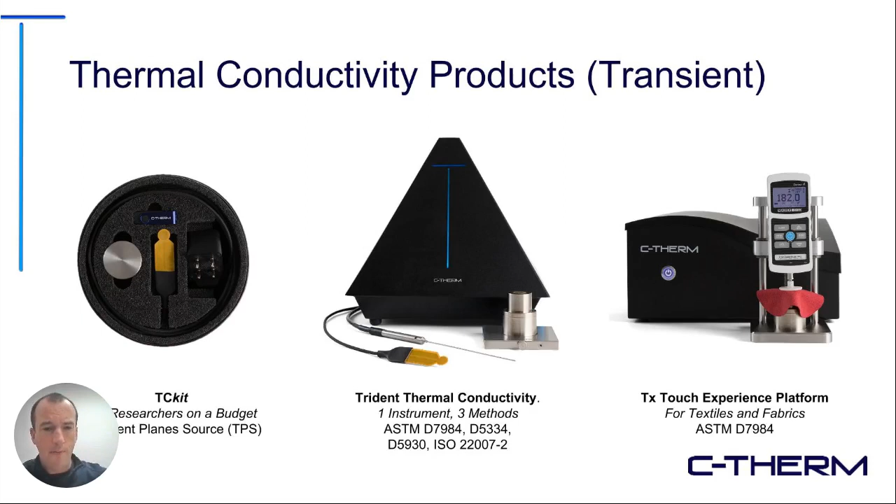But what you'll see featured in the content that Sarah will present largely focuses on the MTPS method. That's the stainless steel cylindrical shaped sensor that you see on the right of the controller, the Trident controller. You'll see a little bit of content on the Flex TPS as well. It's very useful in testing concretes and cements.

You probably won't see much of the needle transient line source in this presentation. It's reserved more for testing soils, for testing very sticky materials that might bond to the sensor. So a polymer melt would be a good example. But with Trident, it's a platform overall that's really meant to bring together the best of those available transient methods. The tag on the product is that it's one instrument, but it's three methods for thermal conductivity. And in thermal conductivity, particularly when you're dealing with a wide range of sample formats, it's truly better to have options at your disposal.

This just gives you a sense of the size of the sensors. So the needle probe is 150 millimeter in length. The Flex TPS sensors, those can come in a variety of sizes at 6, 13, and 30 millimeters. And then the MTPS has an active area on the surface of the sensor of 18 millimeters in diameter for the sensor. That would inform the minimum volume of material for you to run a test.

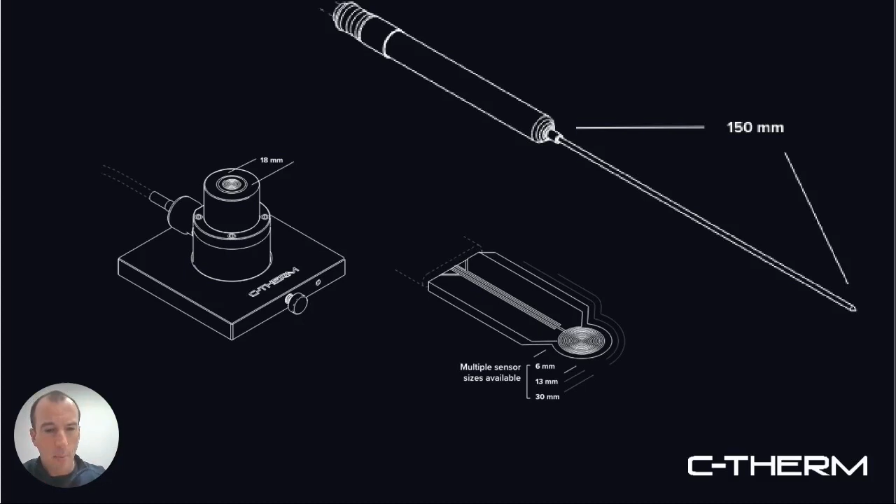Okay, at this point, I'm going to pass this over to Sarah, who's our expert in transient thermal conductivity measurement. She's a tremendous resource to us here at C-Therm, and I'm really pleased to have her come in and share that expertise with you. She'll be highlighting some different applications. This is meant as a training session in understanding how to measure the thermal conductivity of some of these different materials. She'll also detail some of the theory of operation of how those measurements work, which should help better inform you in terms of the capabilities of those particular methods, but also the limitations of where they should be applied. So with that said, Sarah, I'm very pleased to pass this over to you.

Thank you, Adam. I have to stop sharing. Yes, there we go. Okay. One moment. While Sarah's bringing up her slide deck.

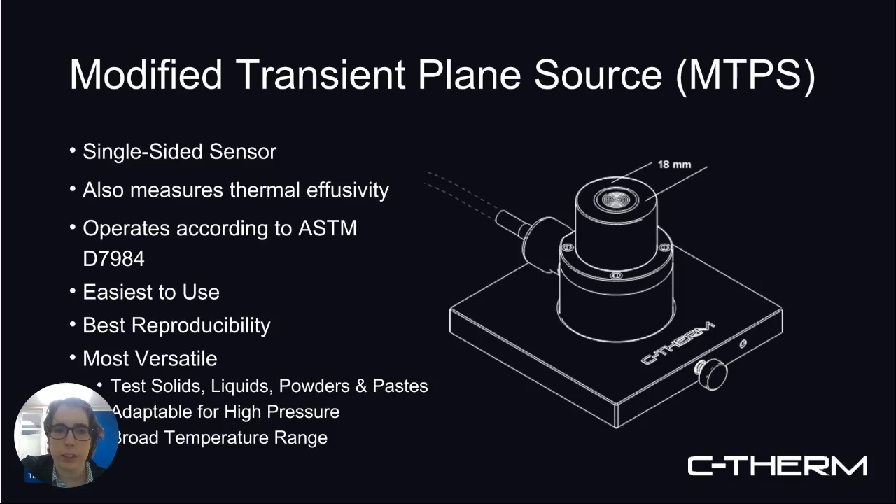Sometimes you may need to apply a bit of a weight to ensure good contact. Like I mentioned, it's a single-sided sensor, and it also measures another related thermal property called the thermal effusivity. And the thermal effusivity is really what is interesting about the TX instrument that Adam had highlighted earlier in his intro section. And that method as a whole, which is available on 2 of our platforms, is compliant with ASTM standard D7984. Of the 3 methods we offer, it's the easiest to use and offers the best reproducibility in the data, in addition to being the most versatile, which is not to say the other methods are not without their strengths. All 3 methods are very complementary.

So when you run a test with the sample on top of the sensor, if you take a close look at the sensor, what it would look like is a dark spiral trace on top of a green or white background, depending on the model of sensor. And that would be surrounded by a circular dark trace, which is our guard heater. So both the spiral and the guard heater fire at the same time. And what that has the effect of doing is ensuring there's no lateral heat or temperature gradient experienced by the sensor coil. The only gradient it experiences is in the direction directly up from the sensor surface, so normal or perpendicular to the sensor surface.

What that does is let us take a good look at the thermal effusivity and also prepare a calibration for the thermal conductivity so that the end user does not need to engage in any kind of complicated regression analysis or anything like that.

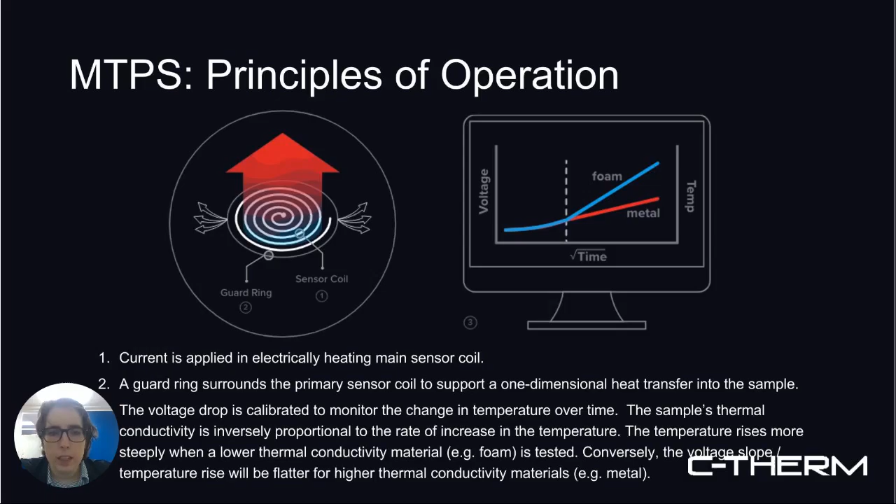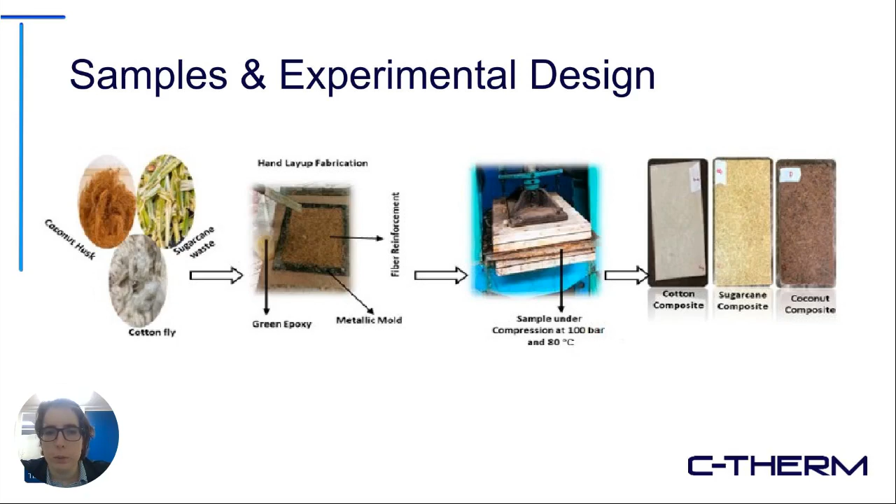So in this paper, they use 3 different types of pore-forming agents, and all of them were bio-based byproducts of other processes. So one was a cotton fly, another one was coconut husk, and then the third one was the sugar cane waste. And then they fabricated these blocks with polymer resin, with cotton, sugarcane, and again coconut. And that was used with the idea of improving the strength of the polymer material and also its thermal properties.

So, as would often be expected, these kinds of organic filler materials tend to be fairly porous. You would expect, and indeed the researchers did observe, that the thermal conductivity decreased as a function of the filler volume fraction. It also appeared to relate to the filler porosity level, which is as would typically be expected, again, of this sort of relationship.

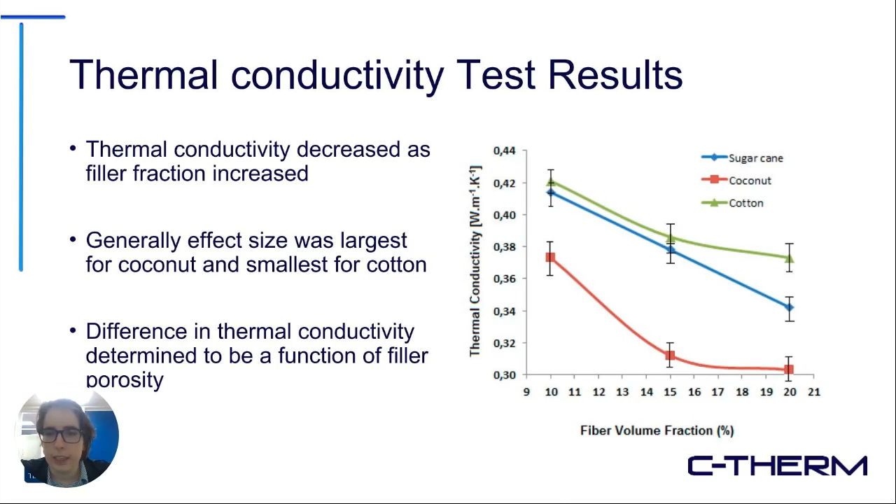The next one that we'll look at is titled Numerical Analysis of Phase Change Materials and Wood Plastic Composite Roof Module System for Improving Thermal Performance. So this was a paper published just this year, and it looked specifically at, of course, wood plastic composites, and specifically the use of phase change materials to regulate indoor temperatures.

So phase change materials, as a refresher, are materials that store thermal energy or heat energy by a change in the physical state of the material, usually as it goes from solid to liquid and back again. So as it heats up, it changes phase and it melts from solid to liquid phase, and heat is stored in that operation. And then when the ambient environmental temperature decreases, it re-solidifies and then the heat is released again. These kinds of materials can cycle many, many times. Although some of them, especially the newer, more bio-based ones, can sometimes degrade over time. The classical petroleum-based PCMs, on the other hand, tend to be very stable even across many thousands of cycles.

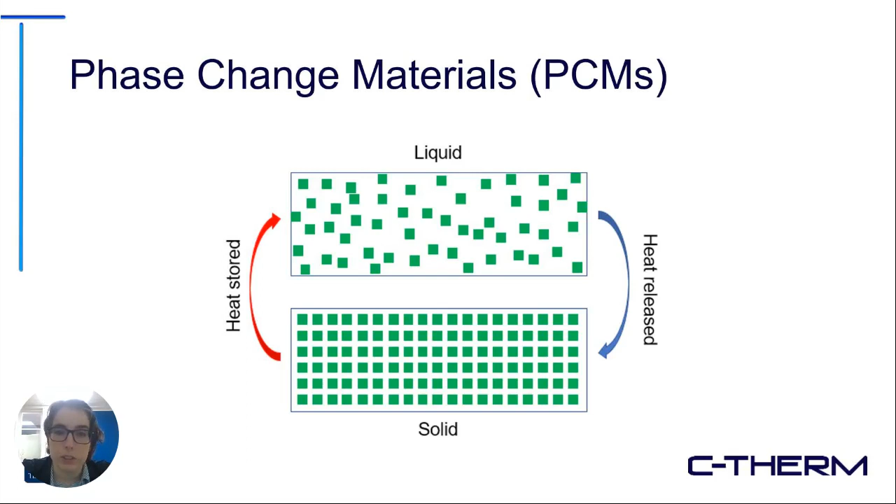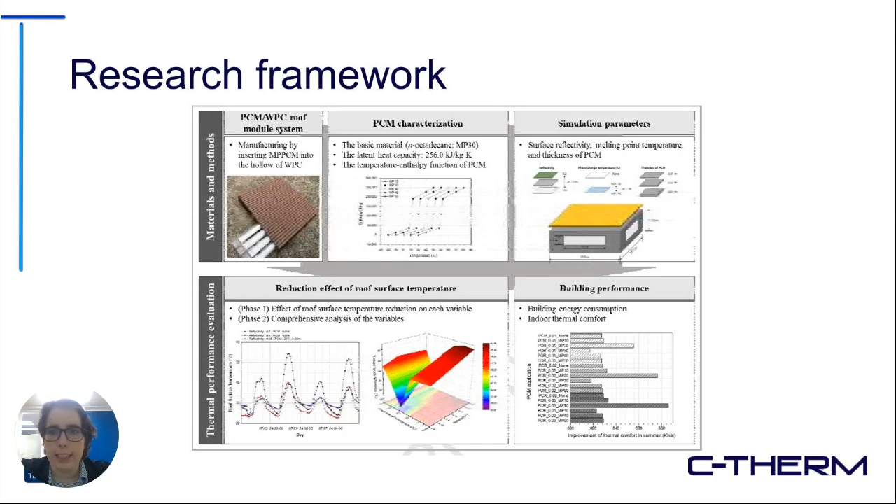So the framework of this particular paper, what they started with was designing the module system that included the phase change materials, and characterized the thermal properties, including the latent heat capacity and the sensible heat capacity of the PCMs, and inputted the data into a simulation to determine how it would perform as a function of yearly temperature variations, both day-to-day temperature variations, as well as more broadly seasonal variations.

So this is an example of one of these plots that was generated, and you can see the roof surface temperature is plotted on the y-axis, and the date and time is plotted on the x-axis. So you can see the daily variations in the roof surface temperature with different types of PCM. So this would be a PCM which was designed to melt at 20 degrees, which you can see in the pink, and one that was designed to melt at about 40 degrees, I believe. And you can see the variation in the temperature as a function of the time. This data was used to pinpoint the optimal roof cooling panel design.

And that in turn was basically inputted into further design and optimization characteristics for the project.

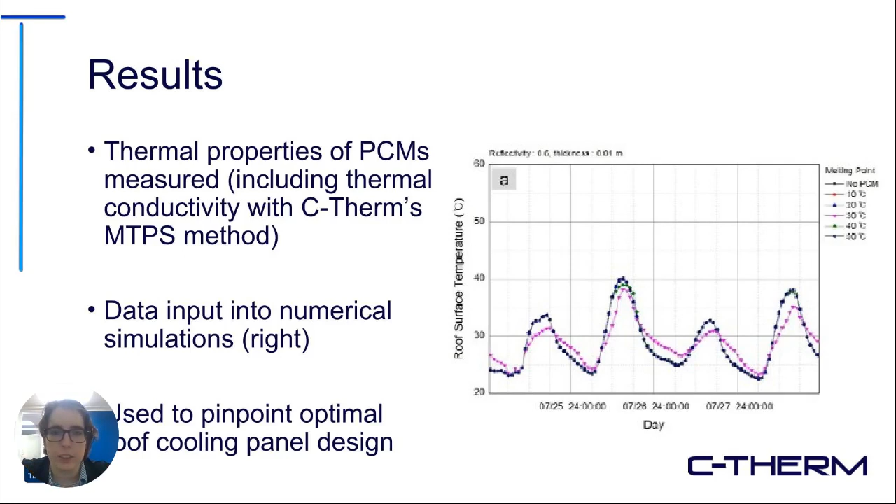This one is from the Journal of Thermal Analysis and Calorimetry, and it's kind of a more survey style project out of the Czech Republic, where they were looking at the thermal conductivity behavior of roofing slates. So a bit of background on this. In the Czech Republic and other neighboring areas, it's quite common to use naturally occurring slate minerals as a roofing tile sort of material. And these are referred to as roofing slates. Usually the material is actually a type of slate that's used.

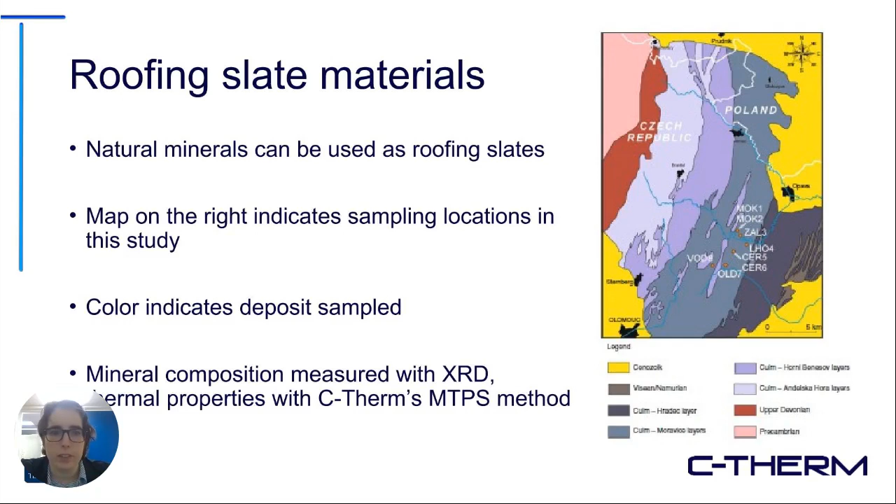So you can see on this plot the anisotropic thermal conductivity behavior of these different slate samples. Some of them are quite anisotropic, with the in-plane direction being twice or sometimes closer to 1.5 times as thermally conductive as the through-plane direction, and I believe in one case it's over twice as thermally conductive with the MOK2 sample. So what that shows is that these materials are much better at spreading heat than allowing it to penetrate through the plane of the material.

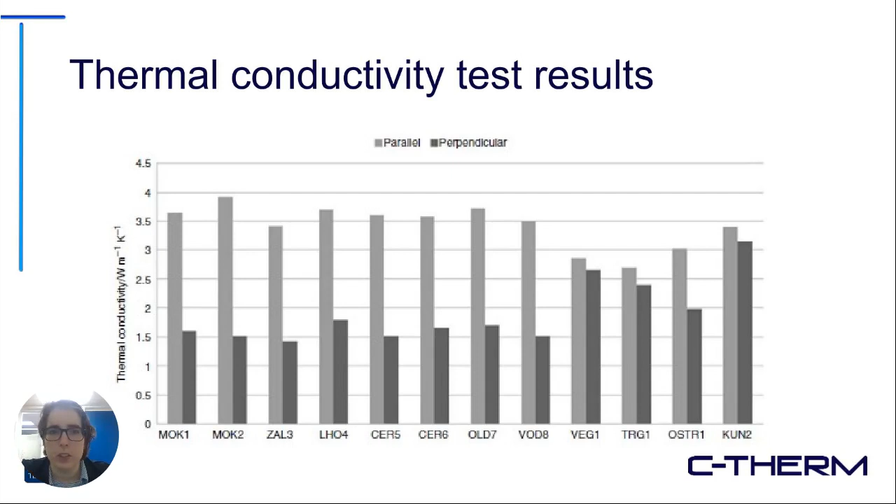And on this plot, you can see the thermal conductivity behavior in the direction that is identified on the previous slide as perpendicular. So it's basically in the through-plane direction. And for these slate materials, as with most metamorphic and sedimentary rocks, you see that the thermal conductivity actually increases as a function of temperature. This is not uncommon for these kinds of materials.

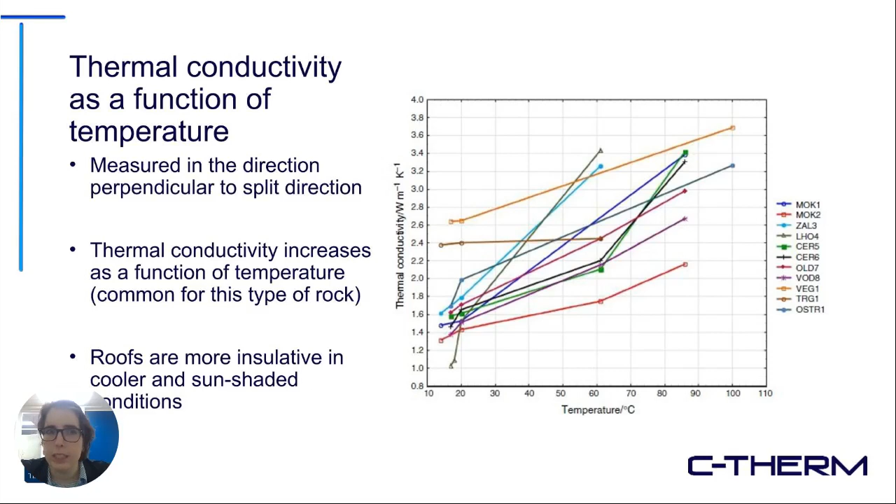What this does indicate, however, is that the roof is going to be more insulative in cooler and in sun-shaded conditions than it would be in the heat of summer, which suggests that it will be more effective at retaining heat in the winter than it would be in retaining air conditioning in the summertime.

The next one was published in the Journal of Construction and Building Materials. It's titled Comparative Study of the Use of Different Biomass from Olive Grove in the Manufacture of Sustainable Ceramic Lightweight Bricks. So this paper looked at 3 different types of biomass used as a pore forming agent. The first one is called olive pruning. The second one would be olive wood, and the third one would be olive leaf. And all of these are waste materials generated by olive production and farming techniques.

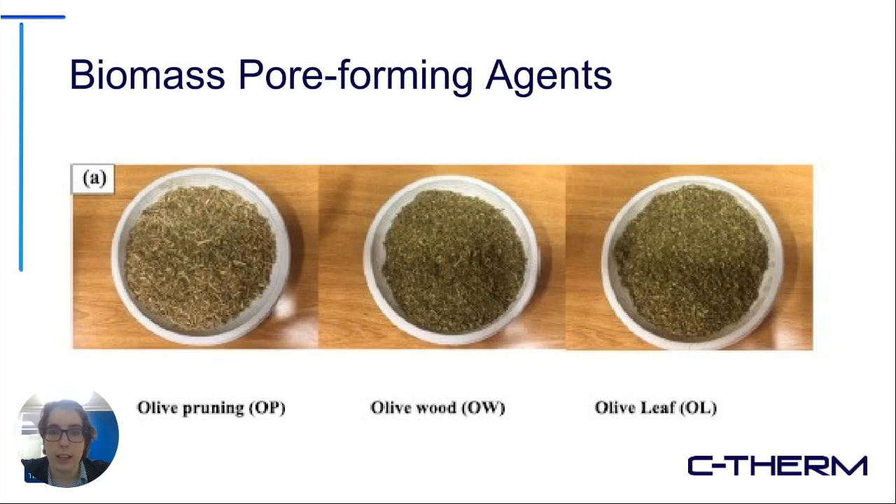So if you can reuse these waste materials, for example, as pore forming agents, you can reduce agricultural waste and also have some added product at the other end of it. So the experimental design generated 9 different types of samples and ran a test on several different pieces of each type of sample. 3 pore forming agents were used, and the first 2 letters of the sample code indicate which pore forming agent was used. The last 2 to 3 digits of the sample code indicated on the brick indicate the fill ratio. So the fill ratio was varied between 7.5% by volume up to 25% by volume.

The pore forming agent and the powdered clay were mixed by volume first, and then 10% of water was added. The resulting mixture was formed into a brick and pressed at 2.5 megapascals of pressure. Then it was fired in an oven up to 850 degrees Celsius, yielding the bricks that you see in the image on the right.

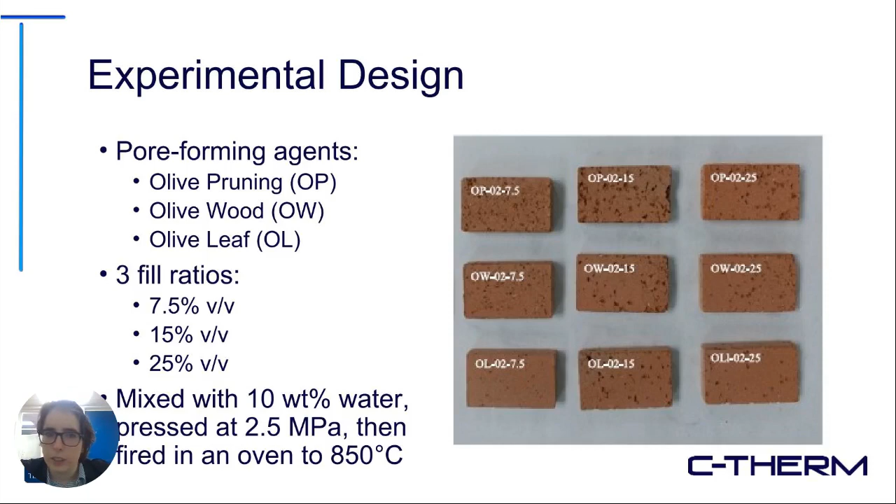So this slide shows the thermal conductivity test results, and specifically the effect of the pore forming agents on the effective thermal conductivity. And you can see also this plot has error bars, which indicate the relative variability of each of these formulations. The best results in terms of a balance of the measured thermal properties as well as the observed physical properties detailed in the paper were obtained with about a 7.5% by volume addition of a pore forming agent.

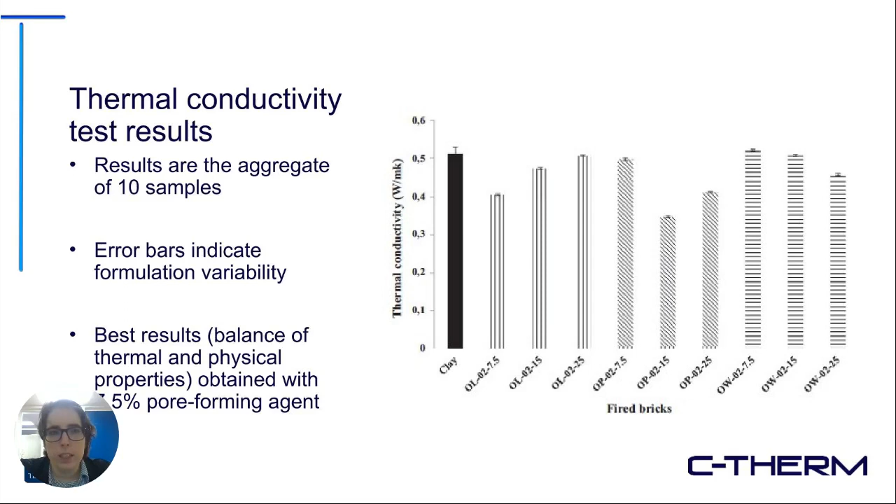We call it our flex sensor because it does offer the user the greatest level of flexibility over experimental parameters and minimum sample size. But it is a bit more demanding in terms of the technical acumen required by the user to attain good test results. So we do recommend it for those who are a bit more experienced with thermal conductivity analysis and the kind of conditions that you need to respect in running these kinds of samples.

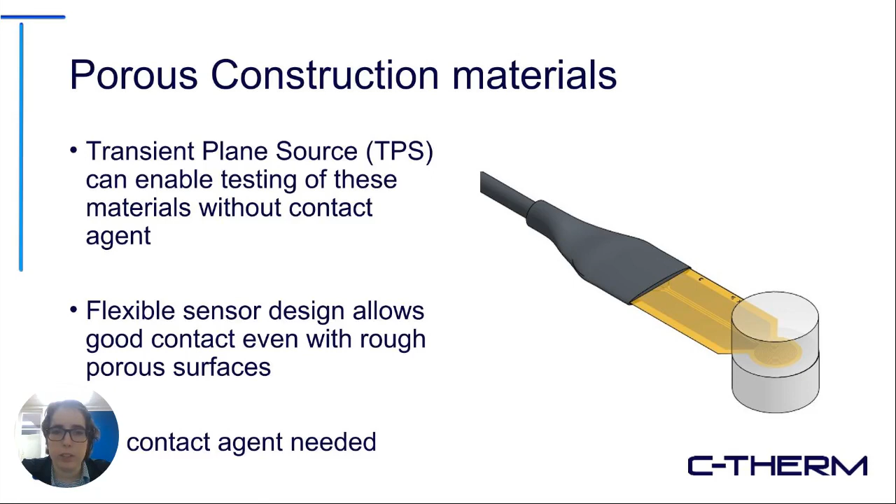The other advantage of using the flex sensor for these kinds of construction materials is that, especially with concretes and brick type of materials, they can be quite abrasive, and that can have the risk of damaging some of the more delicate types of methods out there. So, because the flex sensor is, as the name would imply, quite physically flexible, it's much less likely to risk being damaged when you're testing with a rough surface or a highly abrasive material.

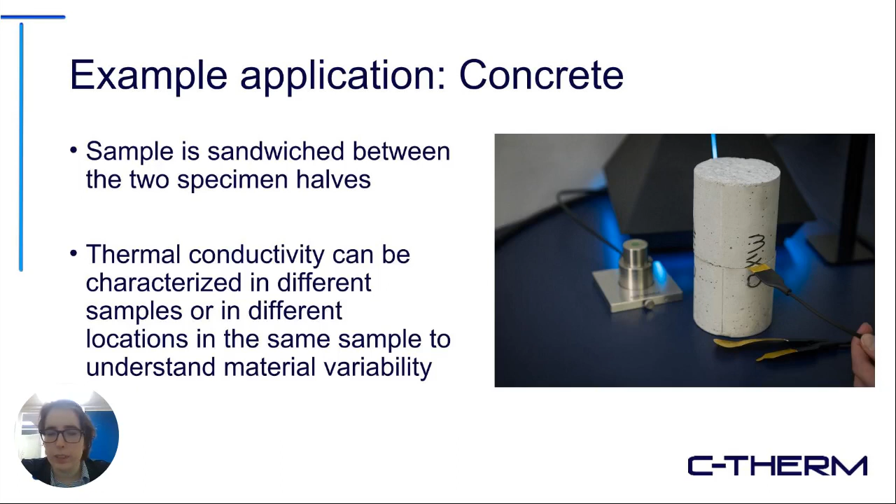So, looking at an example with concrete, in this case, we basically took a single sample from the client and cut it in half, and then sandwiched each half of the cylinder around the sensor to run the testing. Thermal conductivity in this way can be characterized across many different samples or in different locations with the same sample to help you understand the material's variability.